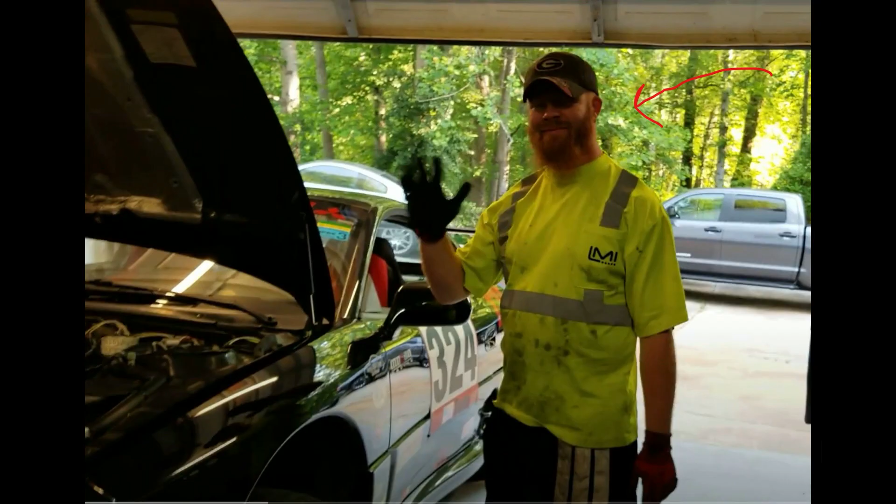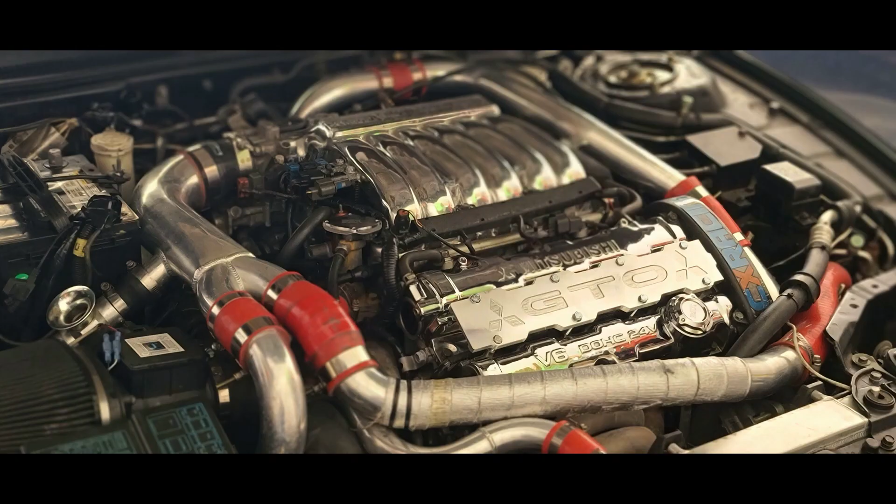I've owned Stickers for a long time, and my good buddy Jeremy Sharp of Remy's Rides and I've upgraded a lot of it over the years. However, one area we have not upgraded is the bottom end. So Stickers is still running on the original 27-year-old pistons, rods, crank, etc. Everything on the bottom end. That's important to note here as we're talking about a 500 horsepower goal.

Personally, I believe it is fairly easy to get these cars into the 400 horsepower range with just a few modifications. With some more, you can get into the 500s. However, once you start aiming for the 600s, 700s, and more, we're talking about a big boy build where you're going to need to upgrade all of your bottom end, as well as other areas of the car, just to support the massive amount of torque and horsepower that you're going to be putting down.

I'm going to list all the upgrades we have on Stickers currently down in the details section below. Ultimately, your vehicle's horsepower is going to come from a combination of all the upgrades that you've made. Some of them will be more significant than others, but at the end of the day, all of them are going to contribute to your car's power.

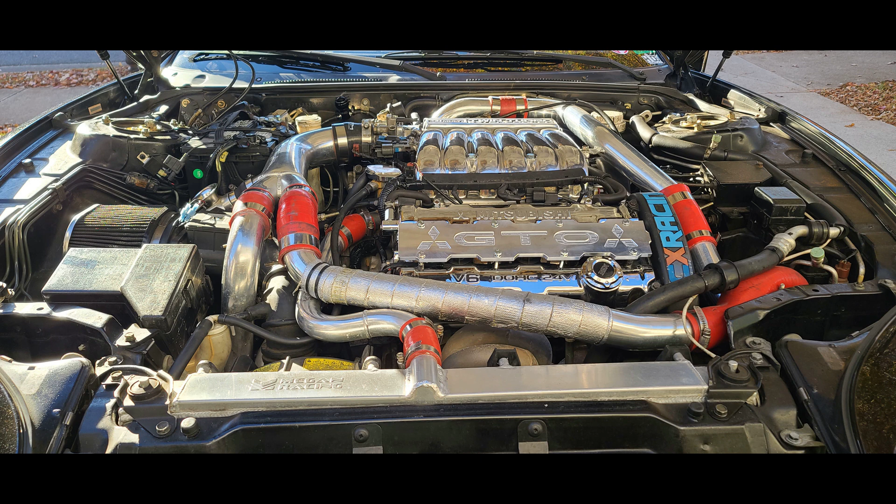For example, having a good free-flowing exhaust system will decrease the back pressure, resulting in less exhaust pressure on your wastegates. In turn, that will allow them to stay closed longer and increase your boost and allow you to maintain that boost longer. Another example is your clutch, because once you start making, say, 400 foot-pounds of torque or so, the stock clutch is going to start slipping. If you don't upgrade that, it won't matter how much your turbos are putting out because you're never going to be able to deliver that power to the wheels.

You get the idea. Now, having said that, the two primary upgrades that are going to be necessary to get into that 500 horsepower range are going to be turbos and fuel support. Without going into a tremendous amount of detail we discussed in the past video, the limitations of the TD04 9B turbos that come with the car. You can upgrade to 13Gs and probably break into the 400s, but if your goal is 500 horsepower, you will need at least TD04 15T turbos or something in that area.

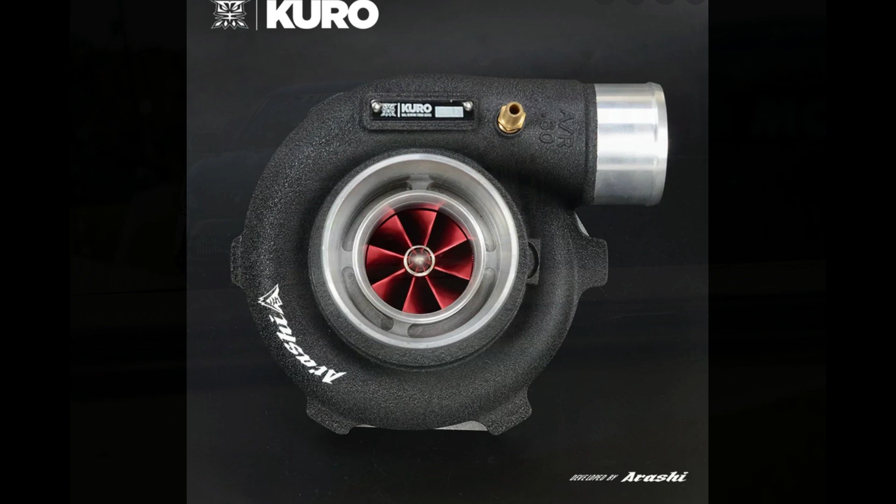Now, Stickers is running on 16T billet ceramic coated turbos. A lot of our customers are running Arashi or Kinugawa 20Ts, both of which provide a lot of support above and beyond 500 horsepower. As well, I'd recommend the 3SX Executioners.

So with the upgraded turbos, the mistake a lot of people make is that they upgrade just the turbos and expect to suddenly start making a lot more power. But in order to spin those bigger turbos faster, you will have to supply a lot more fuel.

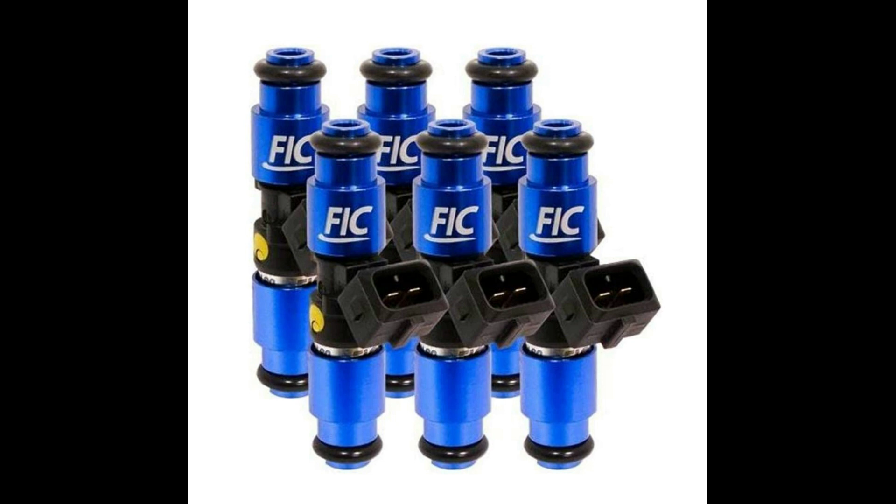And that starts with upgrading your fuel injectors from those stock 360cc to, let's say, a minimum of 750cc injectors. And that's if you're running pump gas, maybe pump gas with meth injection or race fuel. If you're going to be on E85, then you're going to need a minimum of 1000cc injectors. Bear in mind that the higher octane fuel you run, the more boost and the more timing you'll be able to add without running into knock.

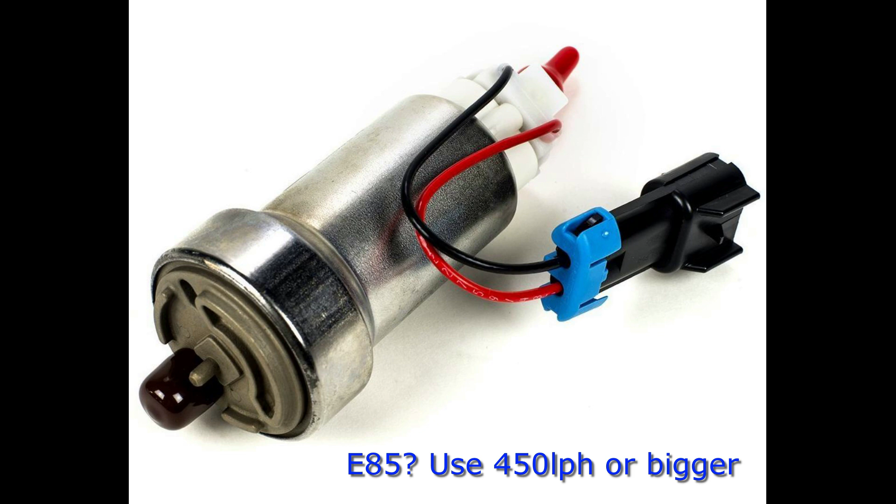Fuel choice is also a factor in how much horsepower you can make. In order to support those bigger fuel injectors, you're going to need a bigger fuel pump. A minimum would be the standard upgrade to, say, the Denso or Walbro 255 LPH pump, along with a hot wire kit and an aftermarket fuel pressure regulator.

With the bigger turbos and increased fuel delivery, you'll have enough power in your hands to dramatically change your car. However, unless your car was built in 1998 or 1999, you're going to need an aftermarket ECU in order to tune the car to handle all that additional fuel and the bigger turbos.

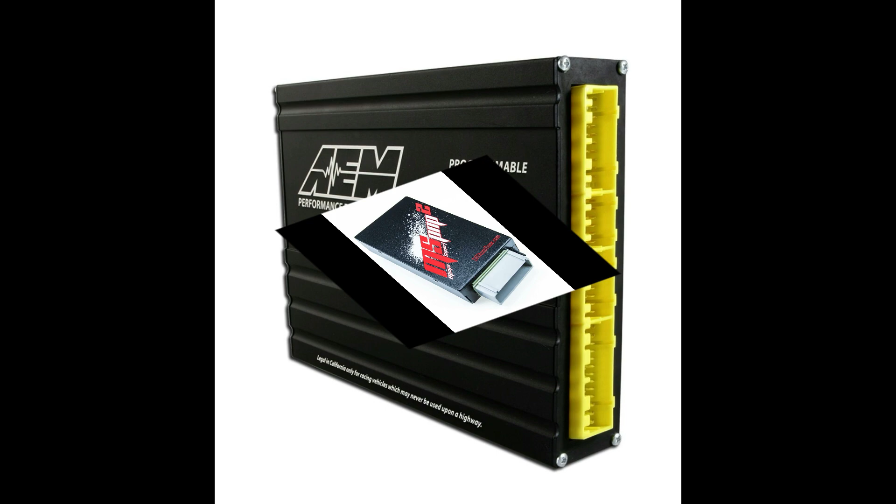And here's a very important thing: you can get to 500 horsepower or more on practically all of the available aftermarket engine management systems for the 3000 GT. That means you can get there with flash tuning on a Jester Chrome ECU. You can get there on a standalone like AEM, whether that be version 1, version 2, or Infinity. You can get there on Megasquirt, you can get there on Haltech. Each of these engine management systems has things that make them unique, but they all also have a lot of things in common that we as tuners use to create more power.

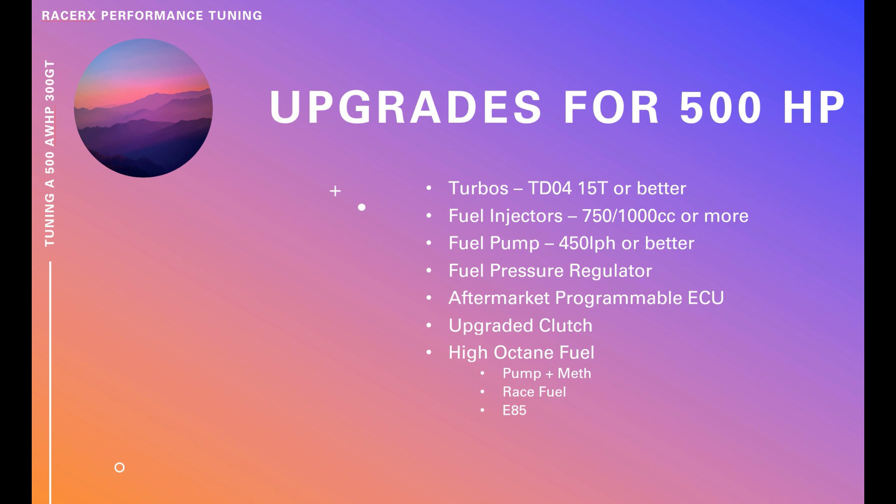So let's get this car up on the dyno and talk about the tuning. At RacerX Performance Tuning, we do a lot of remote tuning as well as local tuning. Everything we're going to do here on the dyno, you can essentially do something quite similar with a closed private road, as long as that road is straight, flat, has no curves, so you can repeat the same wide open throttle pull over and over again to have consistent pulls.

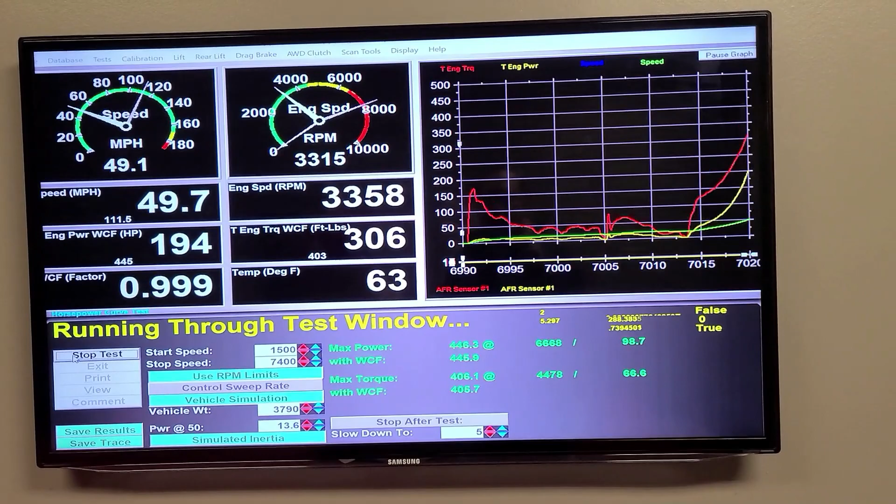As many of you know, we did some tuning with stickers over at DBW Motorsports with Doug Wilkes last year on their Mustang dyno. At that time we ended up around 475 horsepower or so, and my goal here would be to see how much we could improve on that.

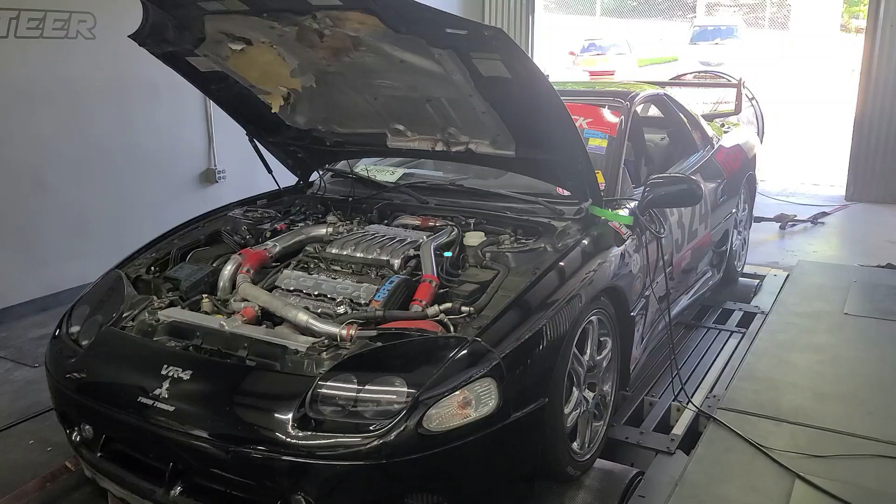Going to work on a few things. I haven't had a chance to tune stickers in a while, so we will see what we're getting, what we can get, and just have a little bit of fun here with my own car. Gonna get going here. We're gonna work on fuel first, which we actually did a fuel run already and it seemed to be pretty good, so that's great. Then we're gonna work on boost and then timing and see how far we can go. So here we go.

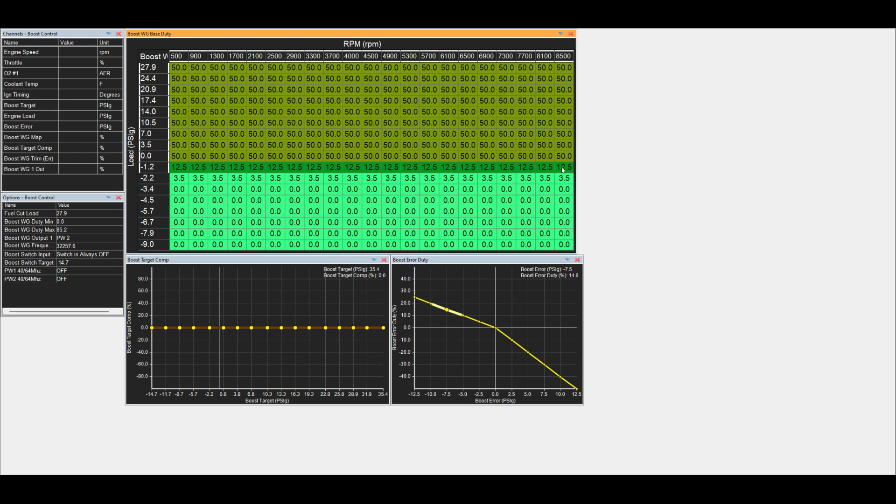And then you can come into your table up here, where you were manually manipulating all the wastegate duty cycles at the various boost levels and RPMs. Again, you can just set all of these equal to 0, and you have the same effect, essentially 0 wastegate duty cycle coming out.

Just for good measure, although it may not be necessary, you can come over to your advanced boost table and make sure you zero out all of your boost targets. Here we had a boost target of 13.3 based on the vehicle speed sensor. Again, select all the values and set them to 0, and essentially there'll be no boost commanded whatsoever.

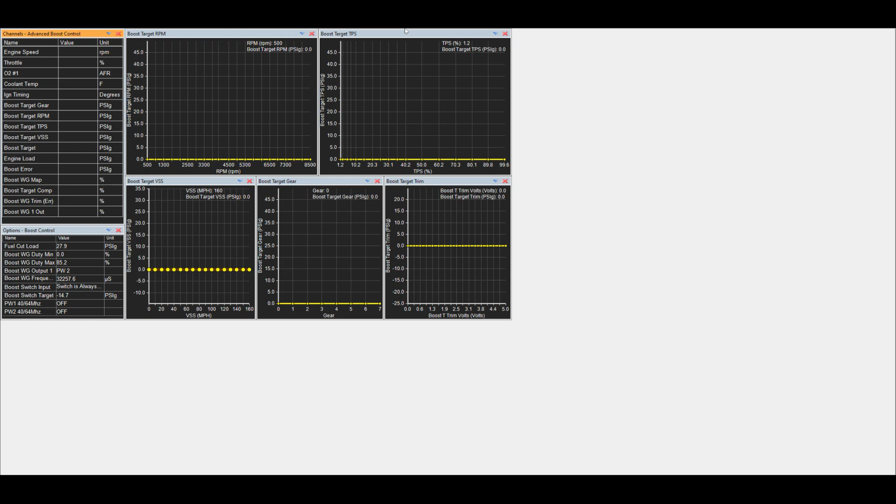This is how you're going to end up running at wastegate duty cycle. Next, we'll go over to our ignition tab, and here's where we're going to go in and severely retard the timing. The way we do that is go into all of the areas that are in positive manifold pressure here, so in this case from 28 psi down to about 3.5, and take off about 4, 5, 6 degrees of timing.

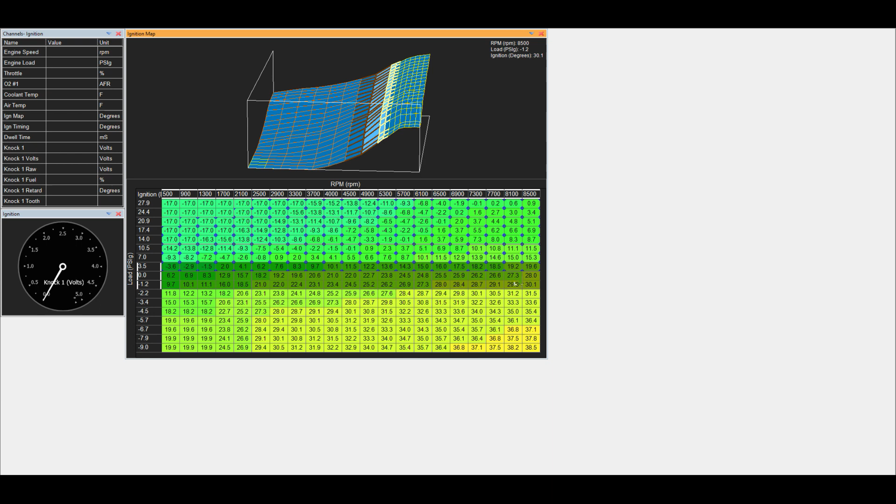Let's take off 5 degrees here, and that's going to bring us down quite a bit. From there, we want to keep things smooth in our table, so we'll do a little bit of linearization, or vertical interpolation, just to keep the map smooth. This is going to take timing out of our equation, allowing us to do that wide open throttle pull without timing being a factor.

You do want to be careful here though. You don't want to reduce timing too low, otherwise you end up with a bit of an anti-lag effect, and essentially you get what's known as boost creep. It will show up at the end of your RPM run, so be careful as you look into that.

When we do this, we're going to have a lot of valuable information available to help us. First, we're going to find out exactly what our wastegate spring pressure is. This will be the lowest possible boost that we can run. We'll also be able to see what our car's baseline horsepower and torque values are, essentially the car running at its weakest power level.

It's always good to know where you're starting from, so you can see how much the tuning process adds to the car's ultimate power levels. So having taken out all the wastegate duty cycle and retarding the timing, we're going to make that pull on the dyno, and then we can look at our results.

So what are we finding here? First thing we found out down here at the bottom is that our maximum boost was 11.24 psi. So basically 11 psi is the most we're going to make, and if you look across the line here, it looks like it essentially stayed at about 11, maybe rolled down to the mid-10s. As we move down a little further here, yeah, it stayed pretty much around 11 psi.

So that's our wastegate spring pressure. We know that it's 11 psi, and we can never go below that. Then at the top here, we're looking at our maximum power. We know that this car, without any wastegate duty cycle and without any timing, is making 334 horsepower and 307 foot-pounds of torque right out the gate. So this is where our starting point is going to be, and we're going to see where we go from there.

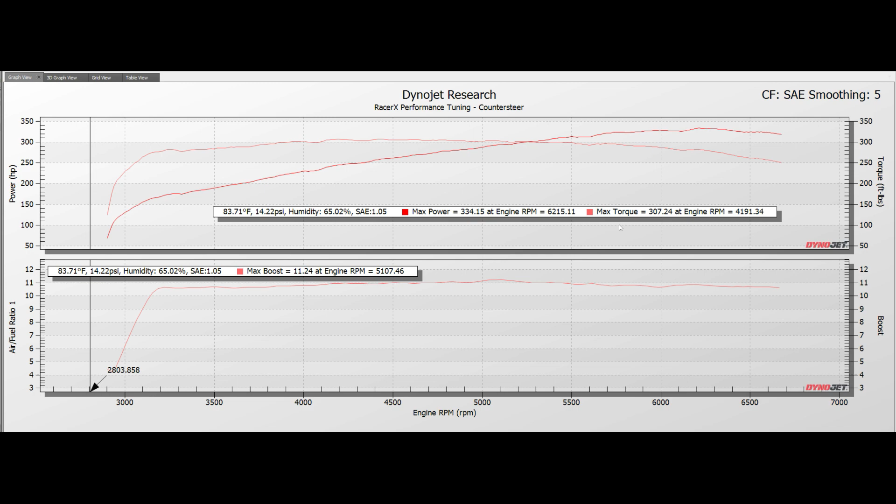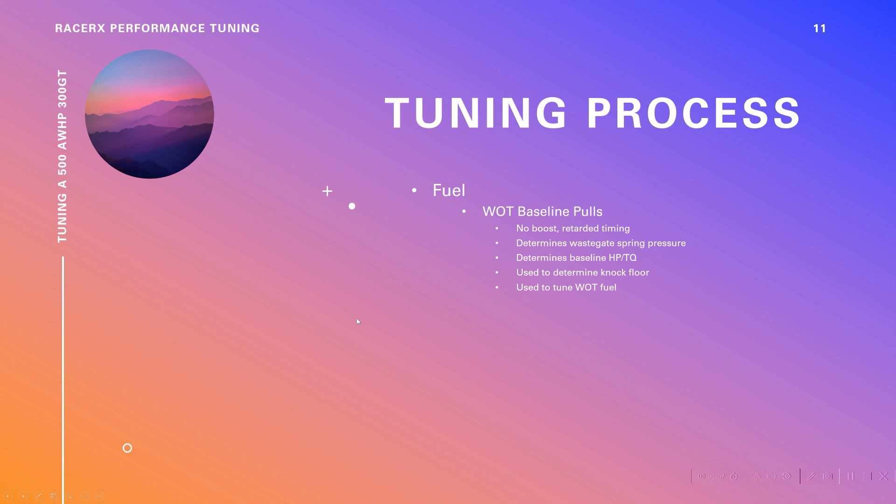We'll also be able to use all this information from our wide open throttle baseline pulls to determine the knock floor, and of course to do all the wide open throttle fuel tuning. We can also use the data from these baseline pulls to determine basically our knock floor.

Now, how you do that is you'll basically go in and take all the raw values, the knock cylinder 1, 2, 3, 4, 5, 6 if you're using a sequential system, or just a knock 1 raw value if you're using a wasted spark system, and go in and chart all this data at 800 RPM, 1600, 2400, 3200, and all the way up until you reach your red line.

What we're going to be looking for is the average voltage, or essentially the average noise that the knock sensor is pulling up at these various RPM levels. It is going to get noisier as you go up in RPM, and if you have a built engine, it's going to be noisier than a non-built engine. The point here is to determine what those average points are and put them into your knock sensor calibration table.

This way, if you are experiencing knock voltage that is above and beyond your knock floor, your knock control system will come into place and start reducing timing or adding fuel, or both.

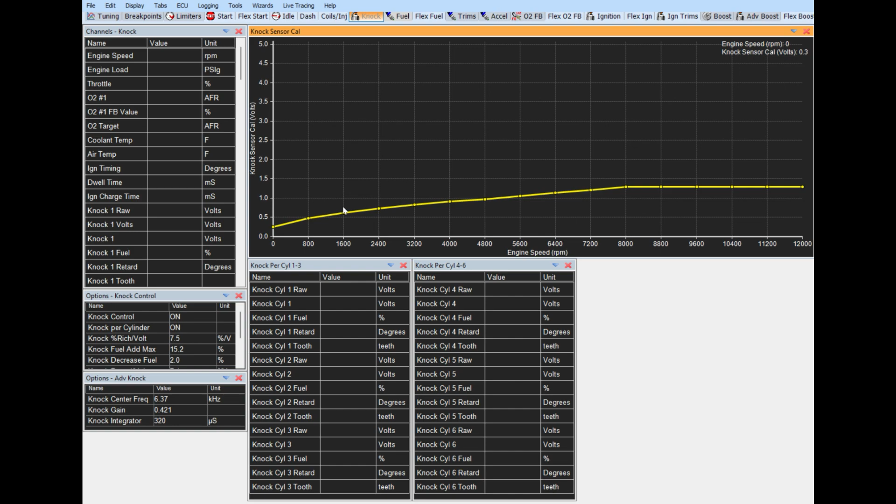If we take all our data from our data log and dump it into Megalog Viewer, we can make a number of charts that can help us evaluate what's going on during the course of our wide open throttle pull. So we'll have areas here where we're going to look at all the fuel characteristics that we want to evaluate.

We've got knock information here. We've got wastegate duty cycle and boost target information here. At the bottom, we've got the RPM and the throttle position, and then some other things: ignition timing, injection duty cycle, and some temperatures.

So essentially, when we scope out the part of our pull, we can see that we're going wide open throttle here from the beginning of this log all the way to the end, and the RPMs are going up from about 3,000 all the way to the end here, which is about 7,000. That's the range we're looking at.

We'll focus in specifically on a couple things. One, as always, every time we do a pull, we want to go in and evaluate if we've got any knock. This car is on a sequential system, so we're able to do knock per cylinder. So I've got all 6 knock cylinder values here. Obviously, I'm expecting to see zero knock information, and that's exactly what we got.

If we're finding that we get any knock here at all, and we've got retarded timing and no duty cycle for the wastegate, then we've got a significant problem. We've got to take a step back and see what's going on. So this is just basically a sanity check here. We shouldn't see any knock at all during this pull.

So now focus on the area that we came here for, which is the fuel. If you see this red line and white line, they're basically overlapping each other, which is a really good sign. It's essentially saying that our O2 target and our actual O2 values are pretty much in sync with each other. Now, this car was previously tuned, so I'm not surprised by this. But if the car hadn't been tuned, we should expect to see some variation here, and we'll go in and manage that.

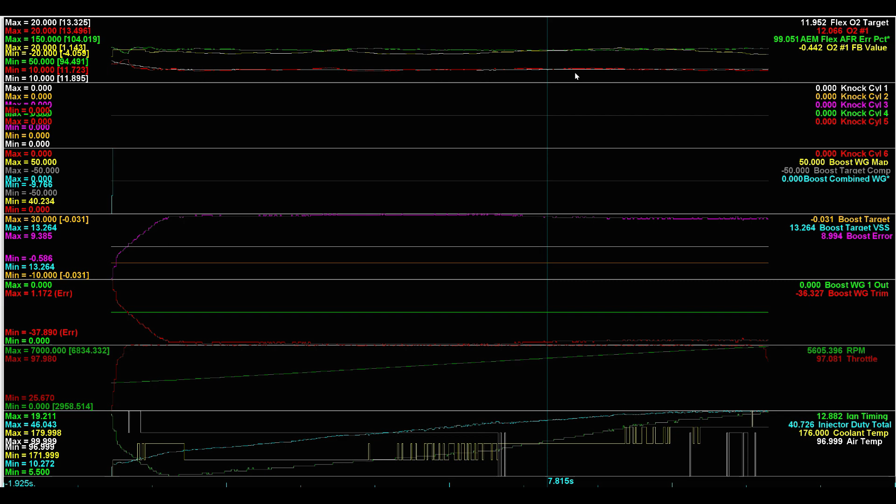Really nothing to worry about here. So again, this looks really, really good. If I see these two lines overlapping each other, I have a feeling that things are going rather well. What I can expect is that at some point previously this car wasn't tuned, that the red line and white line would show some discrepancies. And that's going to help us identify where we need to go into the fuel map and start to make some changes.

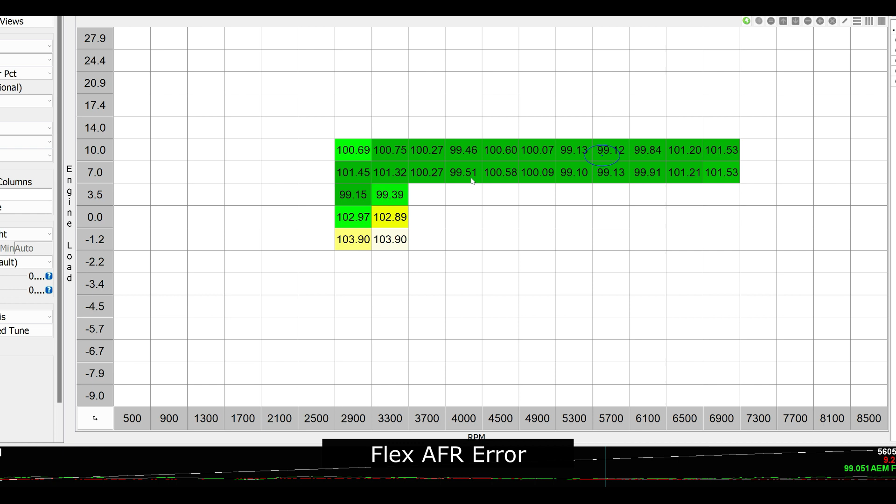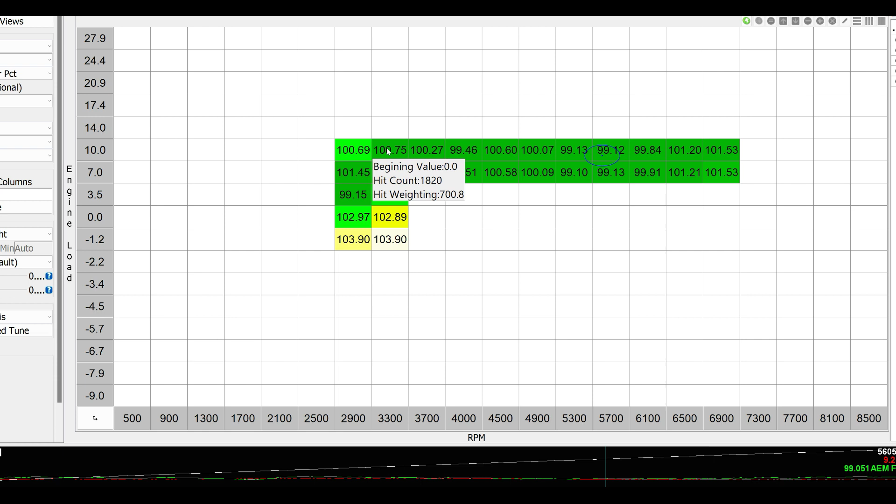We go in and use a calculated field, which is going to say what's the discrepancy between my O2 target and my actual O2. This value I call the flex AFR error percentage. Essentially we're looking for this number to be at about 100. If the division between the target and the actual O2 value is right on point, it'd be at 100.00. If it's a little bit higher than 100, we know our fuel is a little bit rich. And if we're below 100, our fuel is a little bit lean.

What we're looking for is values that are obviously outliers here. We see 99s, 100s, 101 - we're pretty much right in the ballpark. That is reflective of what we saw in our log view, where the red and white lines were on top of each other. So far our fuel looks pretty good here. We go back and make some adjustments, based on where we had discrepancies in our AFR error percentage. We can then go back into the calibration and make the appropriate adjustments there.

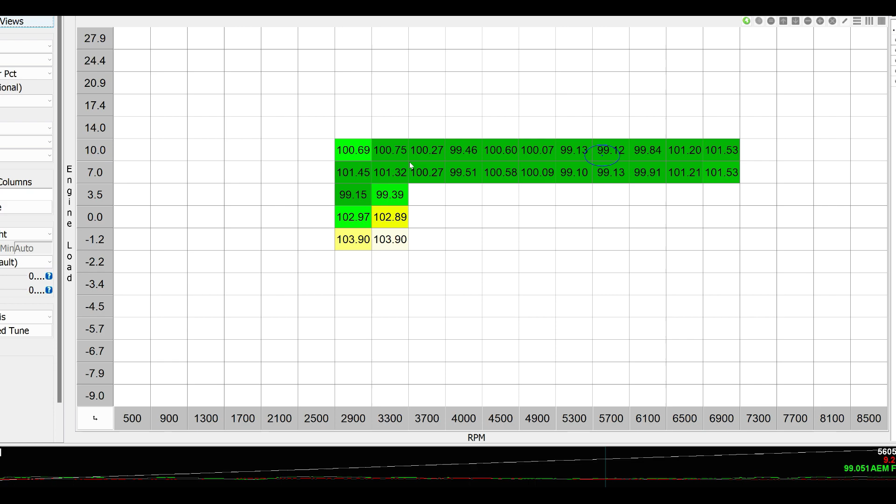So for argument's sake, let's say we found out that during our data log we were running a little bit lean in some areas, or rich. Let's say we found we were running a little bit lean at 10 PSI at 5,300 - let's say 5% lean. We're definitely going to need to add fuel here in this part of the fuel map to help us avoid a potential knock from running too lean. Let's say at 5,700 we found we were running about 3% lean. So again, we're going to need to add fuel here.

Now, just doing these two alone will result in a little bit of a peak right here in our fuel map. We need to go back in and do some linearization, some vertical and horizontal interpolation, to smooth things out so we don't have these peaks and valleys. So we'll take that 5,700 down to 10.5 where we went, and let's first go and interpolate things from left to right - from 5,700 up to 6,500 down to that 10.5 range, using some horizontal interpolation. That'll help smooth this out a little bit. You can see the change in the map there. Then we'll go from 4,500 up to 5,300, again in that same range, and do some horizontal interpolation. We can see that we smoothed out part of the map here. We still need to go in the vertical direction as well.

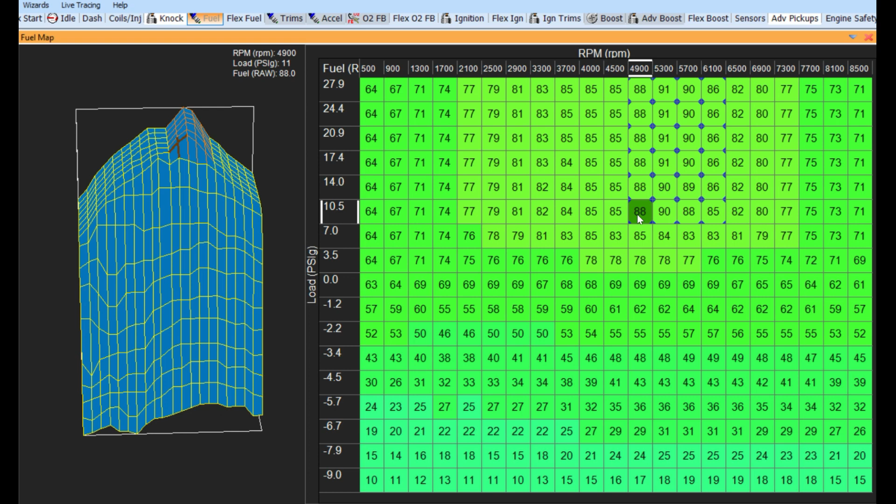Since we made these changes from 4900 on up, from 10 psi to 10.5 psi, let's go back and blend these changes back down into the table, down from 10.5 to 3.5. This will help with that transition there.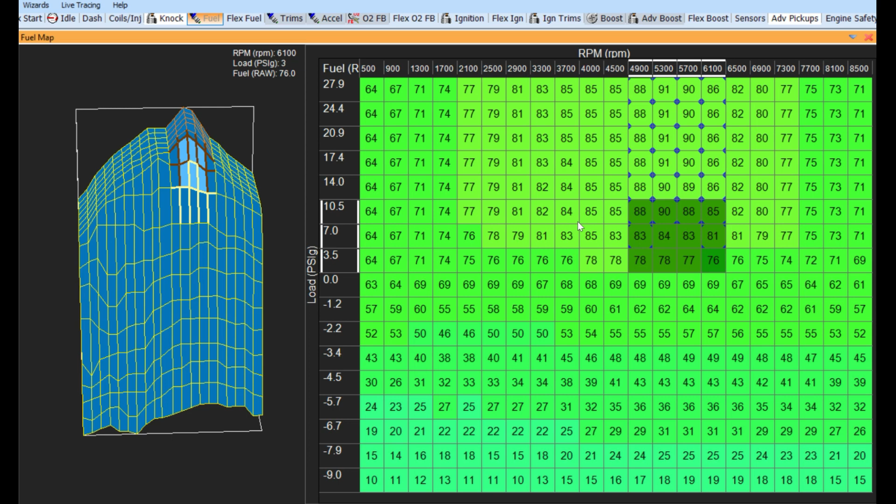So we'll do a little vertical interpolation here, and that starts to smooth out that section of the map. From here, load this calibration onto our car, go back out and do another wide open throttle pull under these same conditions, review the data log, and we should see that we're now no longer running lean in these areas. Probably within about 2 or 3 pulls, we should be able to get all the values in our fuel map straightened out.

And then we'll be done with our wide open throttle fuel tuning. Now, with the fuel tuning complete, theoretically we should not have to worry about the fuel tables anymore, as neither boost or advanced timing should have any effect on the fuel. However, in reality, we will have to continue to monitor it and occasionally make some tweaks to it as we continue.

With boost tuning, our goal, regardless of what engine management system you are using, is to find out how much wastegate duty cycle is needed to generate a certain amount of boost. Once we have these values, we can then easily program in our boost targets and then let some closed loop features add or subtract a little duty cycle as necessary to keep our boost pressure in line.

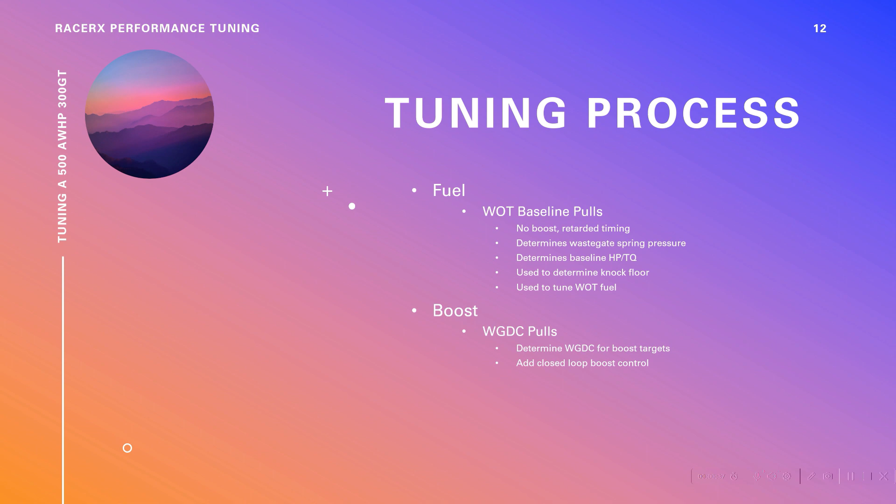You'll find that we can completely optimize boost across the entire power band by using a 3 or 4-port boost solenoid. So AEM gives you a number of ways to set up your wastegate duty cycle.

Remember that word we talked about earlier, equifinality. There is more than one right way to do this.

Now, in the boost tab, you've got these 3 tables: the boost wastegate base duty table, the boost target compensation table, and the boost error duty table. Now these 3 tables actually all work together with each other.

But you could theoretically just go in and manipulate the boost wastegate base duty table and essentially plug in some values for the wastegate duty cycle here that you feel would be appropriate to meet your boost targets, 10, 14, 17, and so forth at these various RPM levels. Go and do some pulls on the dyno and see how well you did and make adjustments accordingly. That is one way to do it, but I think it would be very time consuming and a little bit difficult to manage. Another way to do this is to use these tables together.

So if we go in and, let's say, take all the values from 0 psi on up across the whole RPM range and set them to 50. And then in the boost target compensation table, we also took all of the values here and set them to minus 50.

Now, the effect that this is going to have is essentially: if you have 50% wastegate duty cycle and you have minus 50% wastegate duty cycle, the end result of that is going to be 0% wastegate duty cycle. So essentially right now we're not commanding any duty cycle between these 2 tables. They'll kind of zero each other out.

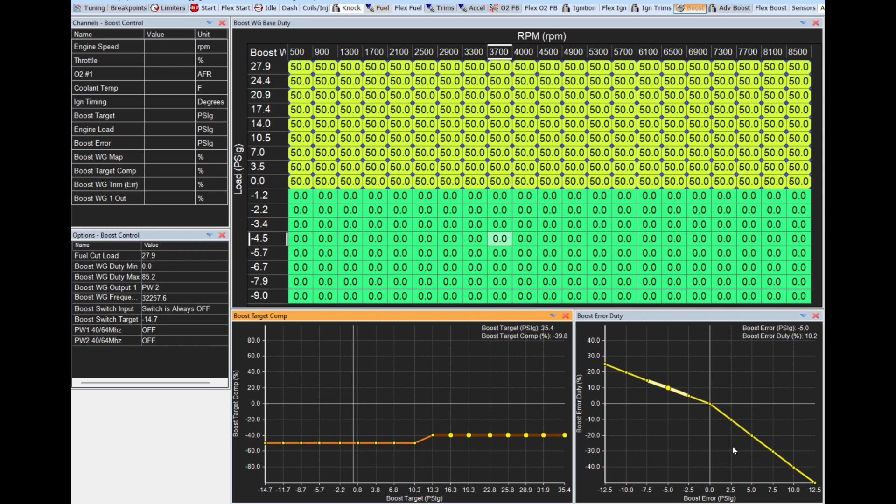So we're just about ready to go and make a pull on the dyno to see how this wastegate duty cycle is going to work for us. But we have to look at a couple other tables before we do that.

The third table on this page, the boost error duty table, is essentially our closed loop. What this does is if we're below our boost target, it's going to add duty cycle up to about 25% here if we're 12.5 psi below our boost target. And if we are above our boost target, meaning we overshot our boost, it will subtract wastegate duty cycle and help to keep us from overboosting.

A lot of people, a lot of tuners prefer to zero this table out while they're doing their wastegate duty cycle boost tuning. I actually like to leave it on because I think that the feedback that we get from this can help us to shape our wastegate duty cycle values a lot faster than we could without it.

Finally, we'll need to move over to our Advanced Boost tab. And here we'll find 4 more tables that all work together as additives. So that's to say, together, these all tables add up to the boost targets that you're trying to get to.

You can have the opportunity to tune boost by RPM, by throttle position, boost by gear, and boost by vehicle speed sensor. Most of the time we start off with just doing this by vehicle speed sensor because it's an easy way to kind of just get all of this dialed in, and then you can manipulate things a little bit later on.

So our first boost target is that 13.3 psi, so we can take all the values and set them to 13.3. So we know that essentially we're going to start to target 13.3 psi as we run through this pull on the dyno.

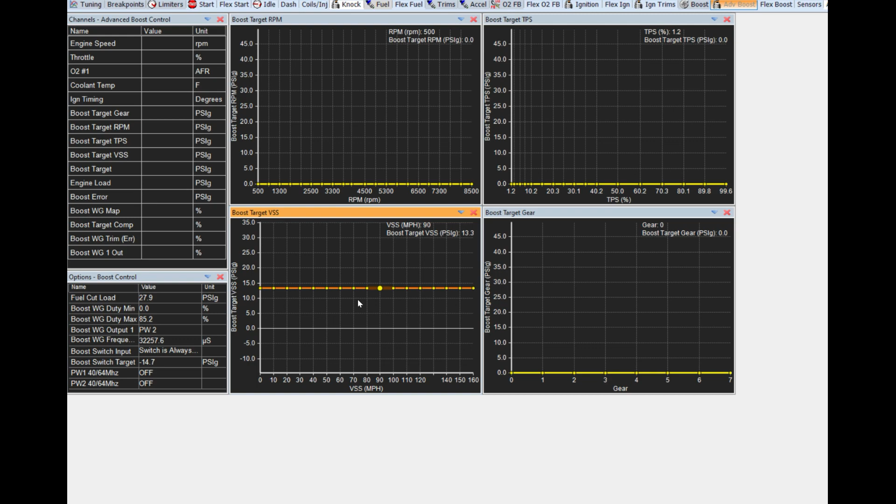Now that we made a pull on the dyno, let's go take a look at the results. As always, we take a little sanity check and just make sure we had no knock. Not expecting any, we didn't have any.

Just checking on the fuel again, red line over top of the white line, and pretty much in sync is telling us that our fuel is still pretty good. We're going to continue to check this. What we do see is that there's a little bit of O2 feedback, subtracting about 4%, maybe 5 or 6% later on. So it's something we can go in later and make some adjustments there. But I will just leave it alone for right now and see how things turn out as we add more boost and timing.

So what do we really want to look at? We want to look at our boost wastegate values. Now let's see how our boost targets and wastegate duty cycle came out.

We had dialed up in our boost wastegate map 50%, and in our target compensation map minus 40%. So together that's going to give us about 10%. Here it's rounded it. The value is 9.376 combined wastegate duty cycle. So we know we're commanding about 9-10% duty cycle, and we're going to see what that gives us.

So what are our results? Well, let's see. Our boost target, as we noted, was 13 psi, and it's the same for the speed sensor, 13 psi. So these two lines are over top of each other, they're matching.

But what do we find out? Our actual boost was 10.582 psi, which is quite a bit lower than our target. In fact, we're about 3 psi lower than our targets. That's our boost error, minus 2.93, essentially 3 psi below where we're supposed to be.

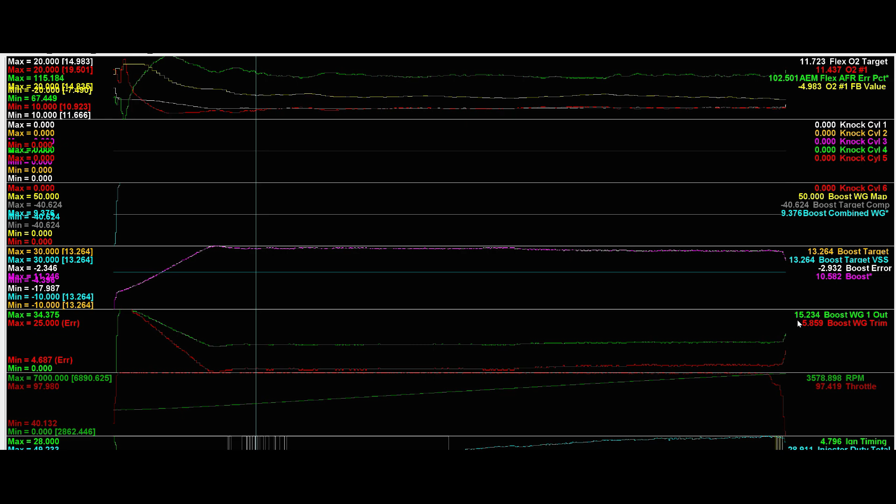So now we can go back, take this information, and update our calibration. And we have something to tell us how to get a lot closer to our boost target.

Coming back over to AEM, with the information we learned from our data log and analysis, we can make some changes. At that 13.3 psi target, we originally added 10% duty cycle and found out that wasn't enough. The ECU used our duty correction file for closed loop, realizing we were below target, and added an additional 5%, giving us 15% duty cycle, and we were still too low. So with that information, let's add some more duty cycle to help us reach our 13.3 psi target.

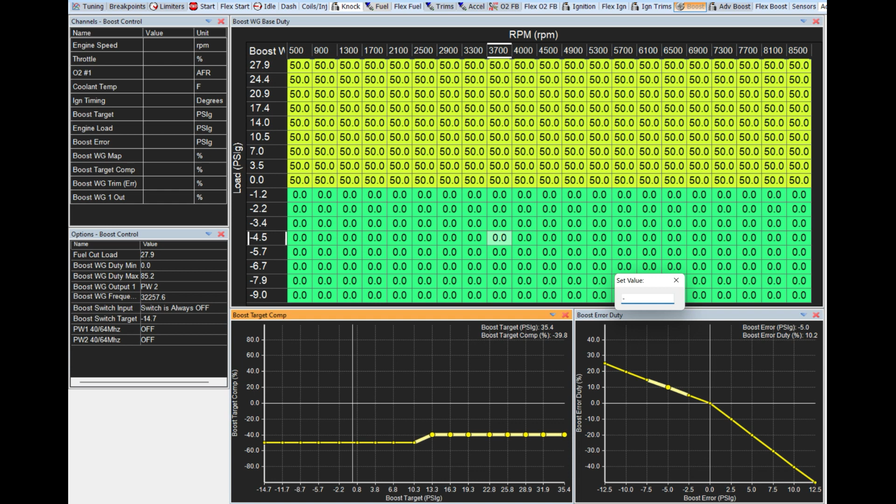This time we'll set this as minus 22. That's going to get us a lot closer to our target with the information we have. The beauty in this is that this is the only table we need to change as we make these adjustments. Before, we had to go in and make all these adjustments based on various PSI targets and RPMs. Here we just need to do it in one spot. So we're going to take this information, do another pull on the data on the dyno, and see what our results are.

With our revised calibration, having made another run on the dyno, we find some really positive results. Quick sanity checks: we have no knock, so I'm not concerned about that. Our red and white lines for O2 and the O2 targets remain on top of each other, so that's also good. No changes in fuel, as expected.

Let's look at what we did with wastegate duty cycle. We had 50% duty cycle from the map, and we subtracted about 22% from the target compensation, giving us a total of about 28% duty cycle now. So before we were running 10 to 15%, now we're running 28% duty cycle.

Let's see the results. Our target still remains 13.3 psi, and now we're commanding 13.5 psi, so essentially right on target. No boost error. Our total wastegate output is 28%, and there's no trim, meaning the closed loop didn't need to do anything to adjust this.

As we go across the rest of the pull, we'll see a few variations, but overall staying true to that 13.3 psi target result, with very little boost error and very little closed loop correction needed from the ECU. This is the success we're looking for, and this is how we'll continue up the rest of the boost targets to finish out our wastegate duty cycle boost tuning.

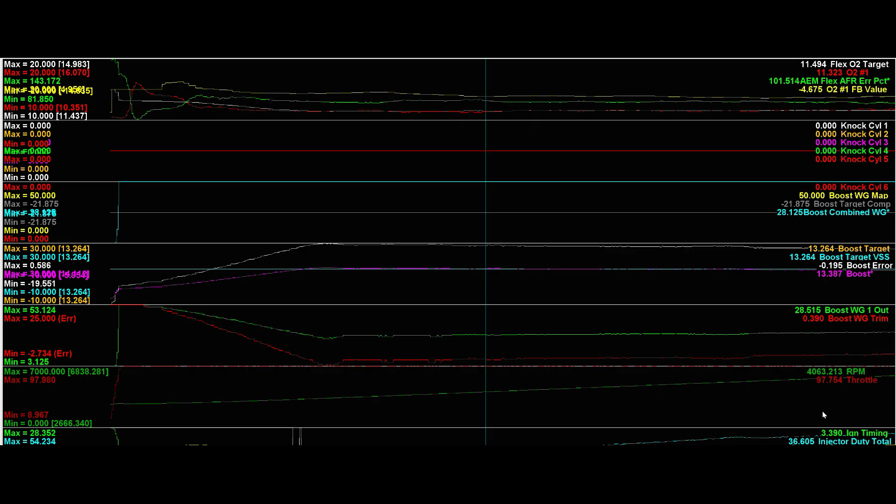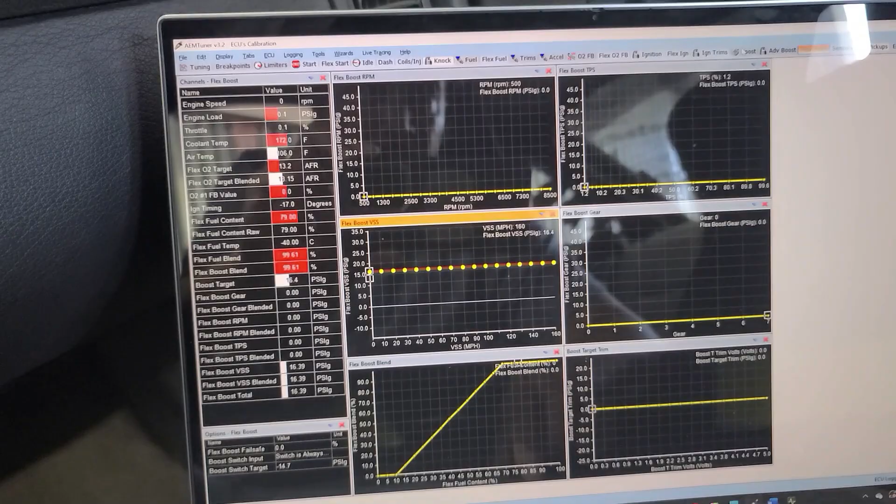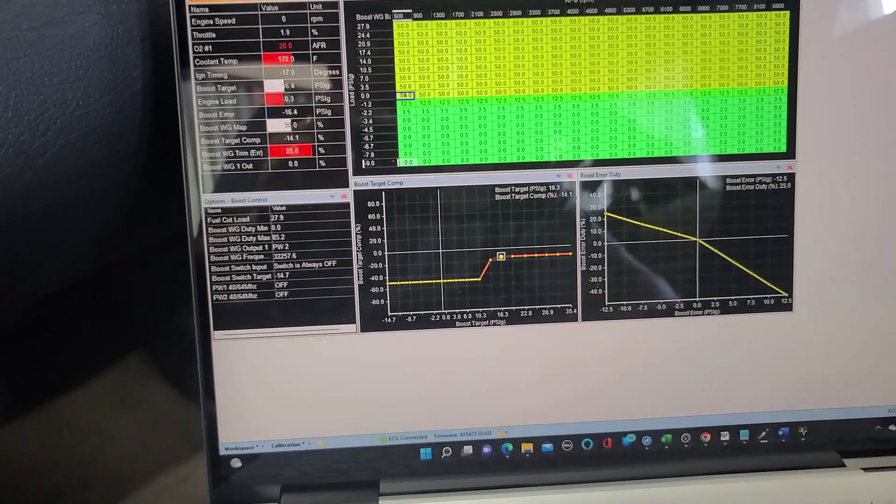Continuing on, fuel is still looking pretty good here. We're working up boost, just working up the boost targets and getting the correct wastegate duty cycle. We finished 13.3, we're working on 16.3 now, and then from there we'll go up to 18 and continue on up. So far so good. 13 is accomplished, let's go on and knock out 16.3.

We continued the boost tuning process in that same fashion. We found we needed to move up a little bit to get to 16.3. Then we targeted 19.3, 22.8, and finally settled in at 25.8, or essentially 26 psi. I decided not to go further than that. We could have looked at 28, 31, or beyond, but there's a reason why I decided to stop at about 25, 26 psi.

Now the beauty in this approach to boost tuning is that you end up only having to work with one table, the boost target compensation table. We get to leave the wastegate base duty table alone and don't have to go through the rigmarole of editing all of these values and interpolating and managing all of that. Simply working on your targets and using the boost target compensation table allows you to get the exact wastegate duty cycle for the boost targets you want.

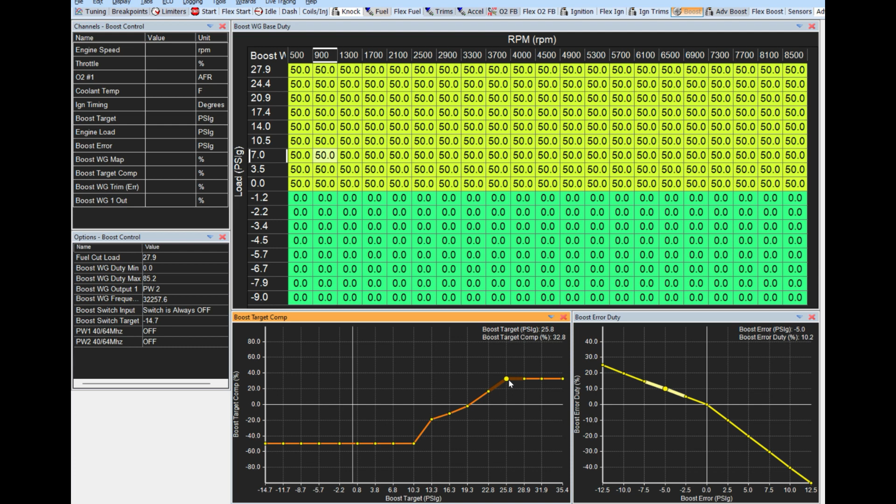Then you go over into your advanced boost tab, where you can set targets you want to achieve at various vehicle speeds, target RPMs, target throttle position, or boosting by gear. The only additional thing you'll see here is at the end. And as I mentioned, all four of these tables work as additive.

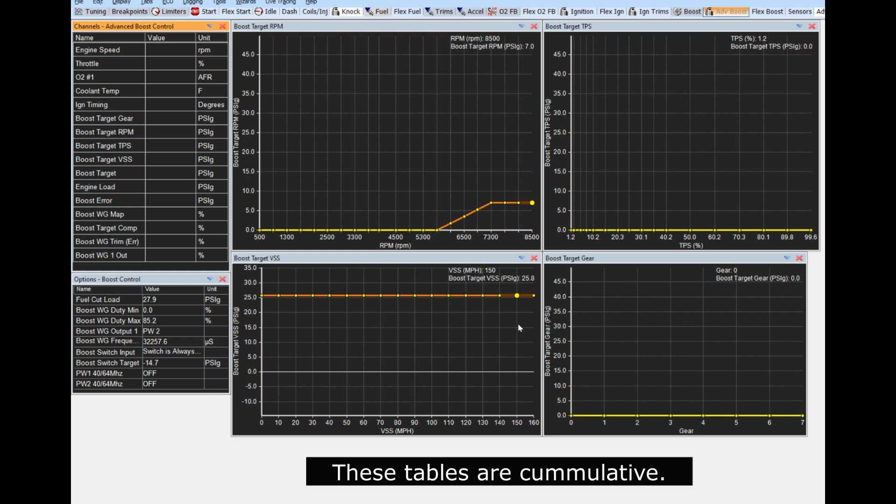So these things together will be added up to be your boost target for your wastegate duty cycle. Essentially, we know that when we get toward the end of the RPM range, we're going to start to lose boost. One way to compensate for that is by taking your boost target RPM table and slowly adding a little bit more boost as you get toward the higher RPM.

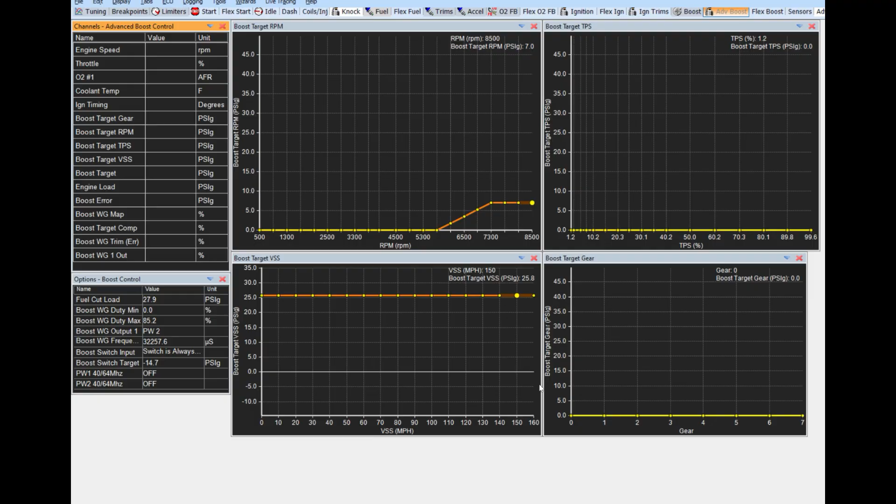It won't always work, but it will try to keep the wastegate duty cycle up there to allow that pressure. Now, as I mentioned, we decided to cap things at 25 psi. What does that entail for us? We had a 32.8% target boost compensation combined with our 50% base wastegate duty table. Essentially, we were running 83% of our wastegate duty cycle to get to this 26 psi.

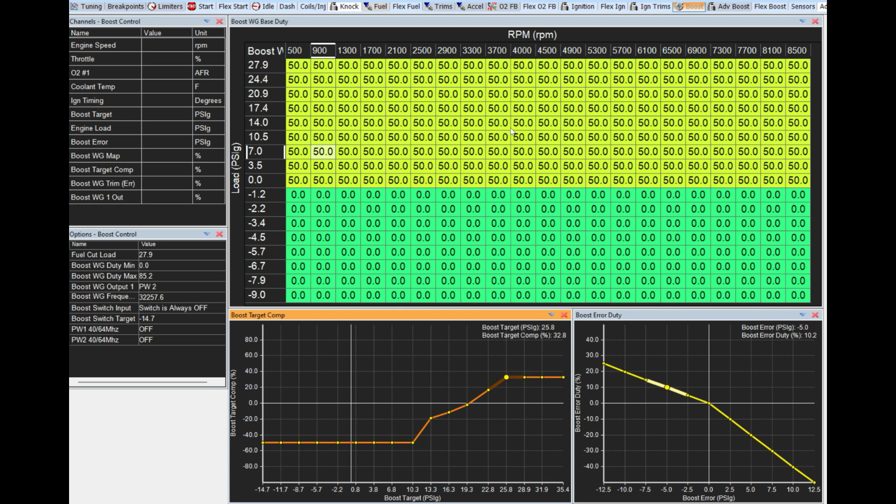Now, could we have added more boost? Yes, but we don't need to. A lot of people, tuners included, think that they need to run as much boost as possible to get the most power from the car. Now, we can continue to make more power while simultaneously prolonging the life of our turbos, right? And that comes with timing advance. So boost and timing complement each other. We're going to see that here in just a moment.

But let's see the results of what we got from the boost tuning that we did do.

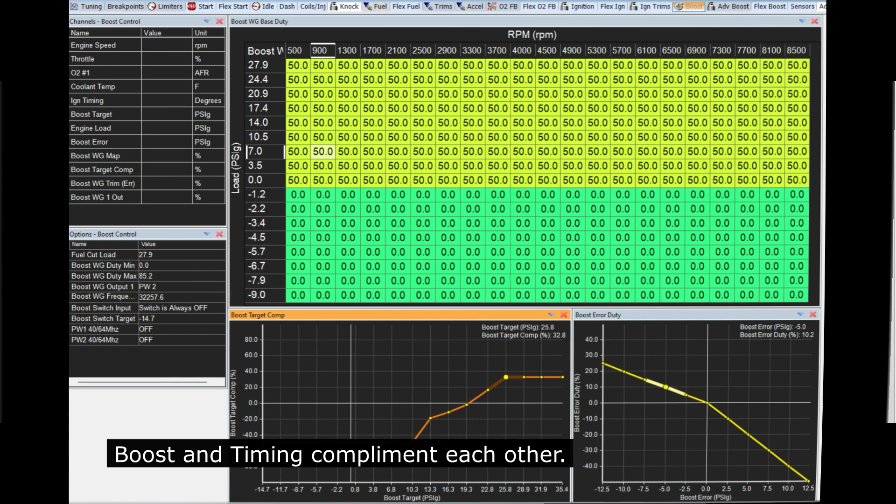Looking at our results on the dyno, if we go back to when we made that baseline run, we can see that we were making 334 horsepower and 307 foot-pounds of torque at that 11 psi. So right there was our baseline. And by adding, looks like we added 13 pounds of boost overall here at the end. When we look at the end here, we ended up getting to 410 horsepower and 376 foot-pounds of torque at about 25 psi. So just through adding boost alone, that 13 pounds of boost, we added 75 horsepower and looks like about 70 foot-pounds of torque.

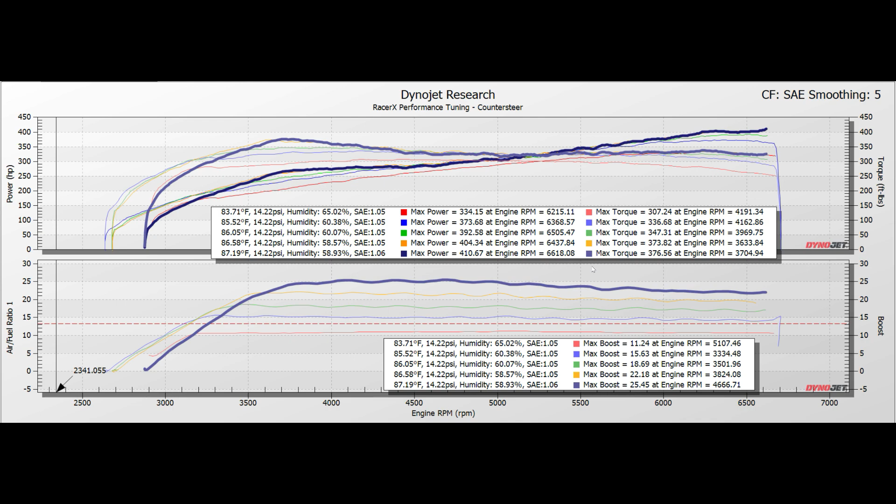And that's not bad. So we're going to take from here and start to do the timing, and we're going to see what more power we're going to make without adding more boost and without having to change our fuel.

Now we've reached the final stage in our boost tuning process, right? We did all the fuel. We haven't had to mess with fuel since then. We did all the boost tuning, and we shouldn't have to change that either as we move forward into timing.

With advanced timing, we're going to work out to this thing that's referred to as MBT, or maximum brake torque. And what that means is we're going to try to get the most timing that we can run without running into knock. And once we've reached the fact that we can no longer make any more torque gains, that's the indication that we can stop raising timing. So we're going to look at that and see how we can maximize timing across the entire power range, the same way that we kind of did with boost.

The interesting part and the most important part is we're going to have to really start to look out for knock right now. We didn't have any knock when we were doing fuel tuning because we didn't have any boost and we didn't have any timing. And we didn't have any knock when we were running into boost because we didn't have any timing.

So for sure, now when we start to get to a certain point in timing, we can anticipate that. We are running on E85. If you're running on E85, race fuel, you're going to have a better chance at warding off knock than if you're running on pump gas. But in either case, you're going to have to look out for it and manage it when it arrives.

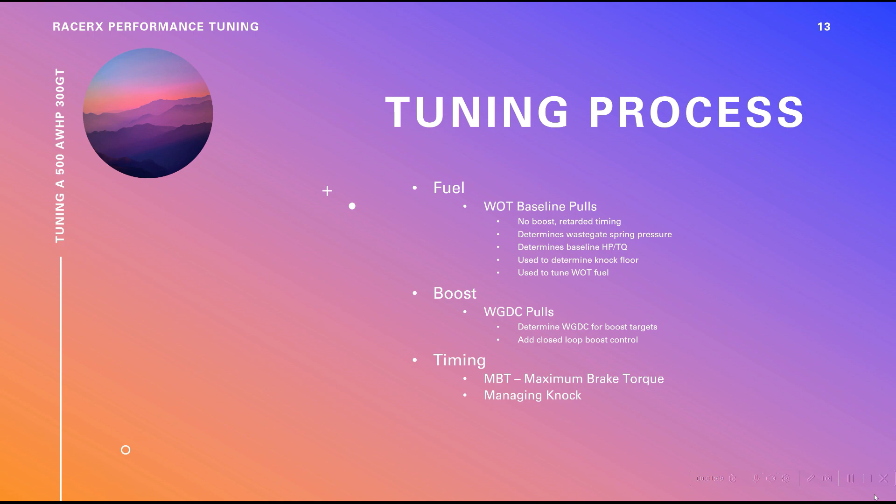Coming back to the ignition map, you'll recall at the beginning of the tuning process, we detuned a whole lot of this map, essentially taking out, I think it was 5 degrees we took out all the way from 0 psi all the way on up.

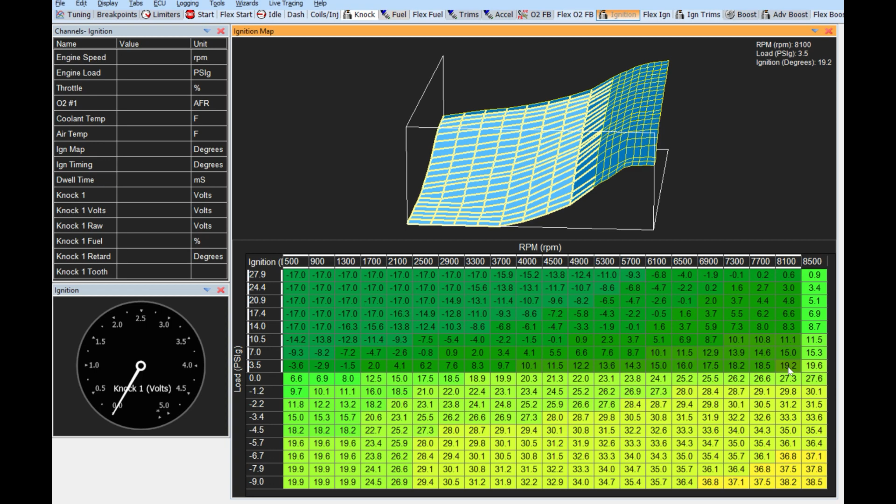Now, my general rule of thumb is to start by adding in 3 degrees at a time. And for this session, we'll start and add 3 degrees all the way across the top from 3.5 psi on up. We just simply push the add button, and we're going to add 3 degrees to all of these values. And then we'll simply go in as we did before and just blend it back into the table with a little bit of vertical interpolation. That'll keep the table smooth, and we won't run into any issues there.

So with this 3 degrees added back in, we'll be able to go and make the run with that and see what our results were.

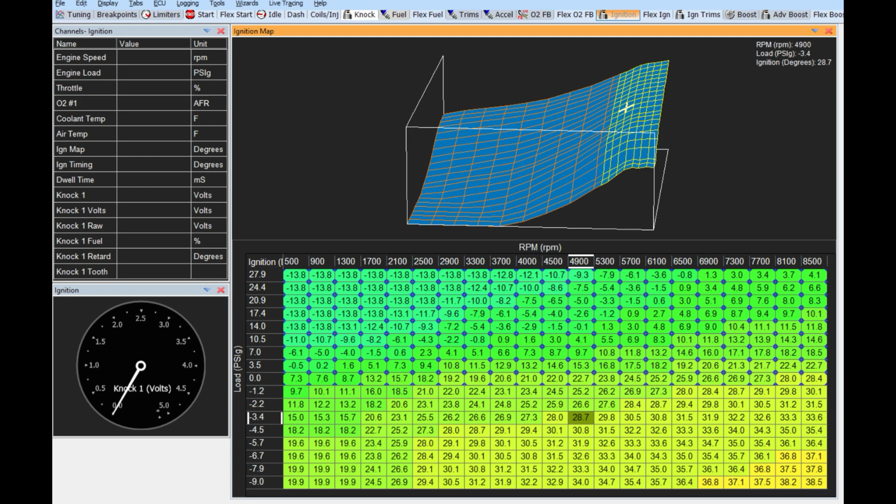Okay, so this is our first timing advance. We're going to add 3 degrees across the top. We're going to keep the boost cap right there at 25.8.

Evaluating our results in the dyno chart shows that the impact of just that 3 degrees of added timing is immediate and impactful across the entire power range. We went from approximately 410 horsepower and added in another 16 horsepower, bringing us up to 426. And on the torque side of things, we went from 376, adding in 30 foot-pounds of torque, bringing us up to 405 with just that 3 degrees of timing that we added.

We're going to be looking at the difference between the previous run and the next run each time we add timing. Here we can see that the red line to the blue line, there's a nice gap between the two, showing a significant increase in torque that we're looking for. As MBT starts to get reached, at some point these two lines are going to line up together. Wherever they've lined up, essentially at that point we've maximized the timing we could add for that RPM range, and we can stop adding timing there. There may be other areas of the graph still showing a gap, and we can continue adding timing in those areas until that gap goes away as well. That's how we're going to work toward MBT.

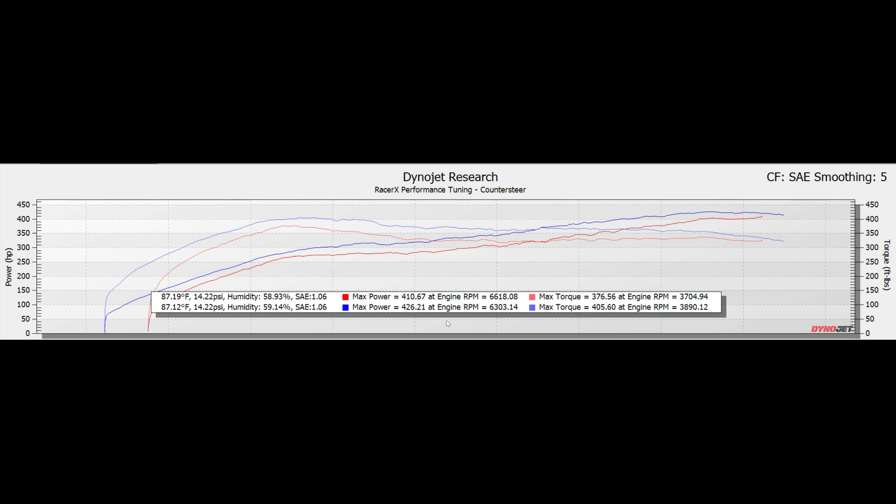Alright, so now we're going to add another 3 degrees of timing from 3.5 psi on up, blend it back in, and see what we're going to get.

As we continue to add timing, we're going to start to notice that the gap between our torque gains slowly starts to decrease in certain areas. Here we can see from 3000 to about 3500, the gains are really shortening up. And from 3500 on up, we still have room for gains to be made. This is where we've reached some maximum brake torque. Right here, we've kind of maximized the timing, and we can stop adding timing in this area of the map.

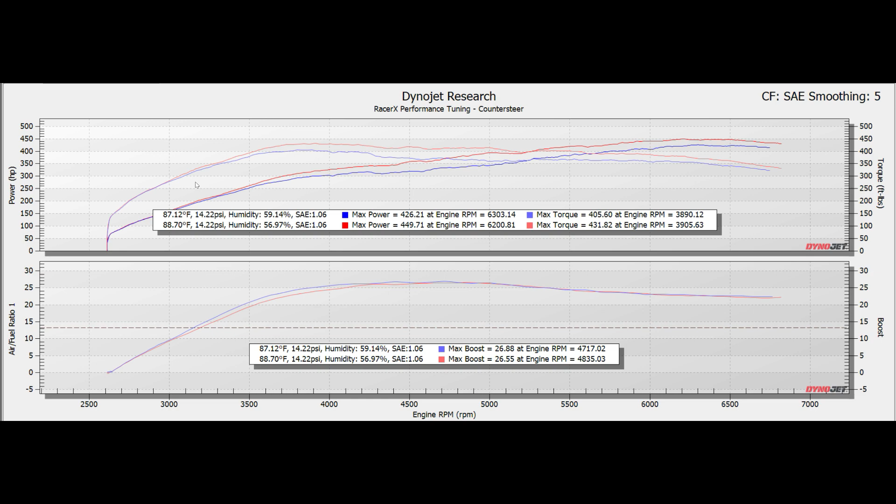Looking at the timing map, up until this point, we've been adding 3 degrees across the board from anywhere in the positive manifold pressure all the way across the whole RPM range. We've been able to get away with that because every time we've done so, we've been seeing torque gains across the board. Now, once we've started to see that we're no longer getting torque gains, we have to stop adding timing in those areas.

So as we noted in the last dyno graph, we saw that from about 3500 on or below, we were no longer making torque gains. So this area of the map, we're no longer going to start adding to. However, the other areas of the power band, we're still making gains. So from 3700 to the end of the RPM range, to red line, we're going to continue to add until we start seeing those areas go away as well.

So the way we're going to do that is we'll take, say, from 4000, from 3.5 psi all the way to the end, and again continue doing what we've done before by adding 3 degrees. We'll add those 3 degrees in there, and then we'll just kind of blend it back into the table so that our map remains consistent. A little horizontal there, and then we'll do a little bit of vertical blending from here on down to minus 1.2. That's how we're going to keep our map going.

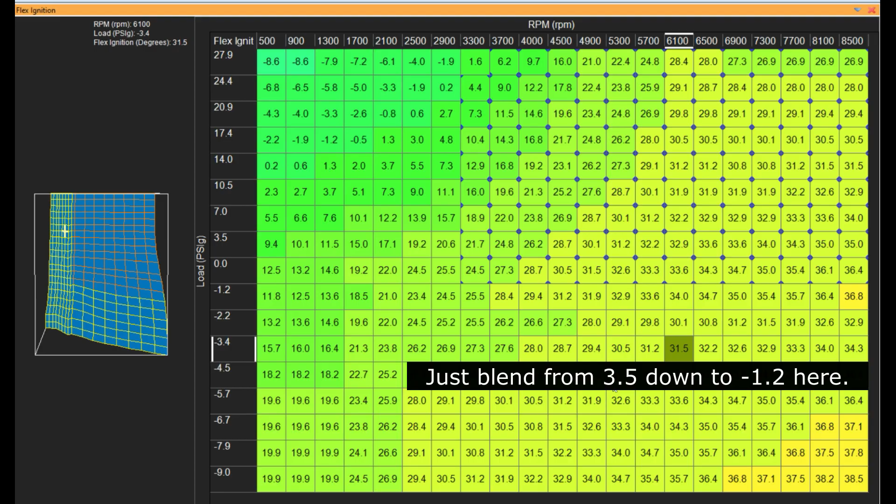Okay, adding another 3 degrees, this time from 4,000 RPMs on up. Last run we got 475 horsepower, so we're trying to get up there.

Looking at our results in the dyno chart, coming from run number 10 to run number 11. Run number 10 is in yellow, and run number 11 is in blue. We can see right now that we've really started definitely maximizing the brake torque and no longer seeing gains in the early part of the map. So here, up through about 4,500 RPM, we've definitely maximized, and we will not be adding any timing there.

You might notice a gap here in the lower RPM range and think there's still room to be made. However, we started running into a bit of a boost leak somewhere along the way. You can see there's a discrepancy here early on, and then things get evened out later in the RPM range. So we were definitely losing some boost there, and that's why we had less torque here.

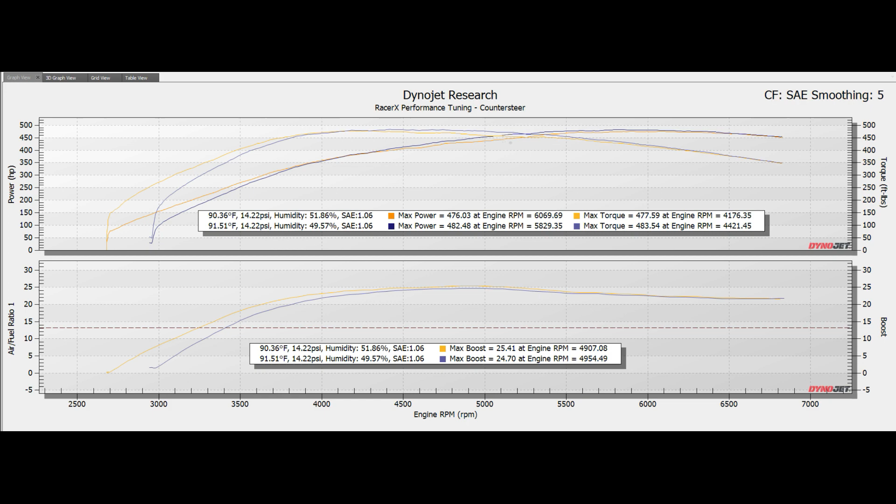But essentially everything from the beginning of the run up through about 4,500 RPM, we've maximized the timing. Later on in the run, from about 6,000 to the end, we've also maximized timing. So we just have this one little area right here in the middle that we can work on, and the rest we're going to leave as it is.

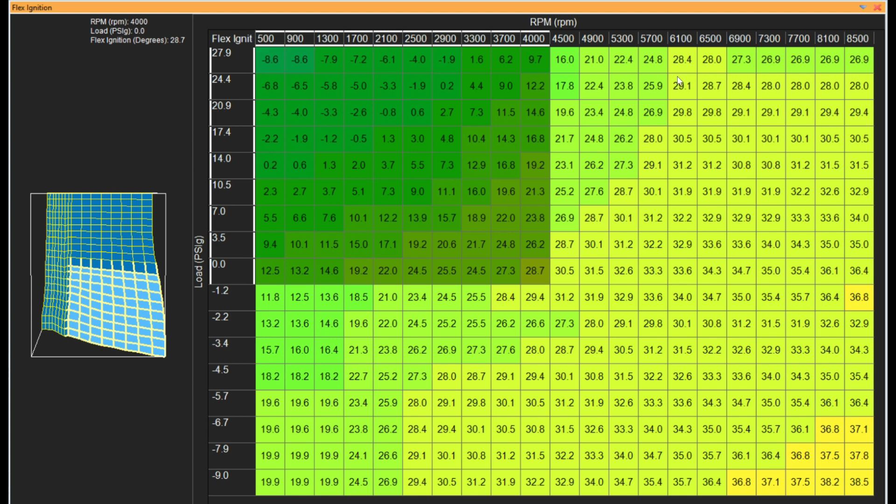Returning once again to our timing map, we know now that maximum brake torque has been accomplished up through about 4,000 RPM, so we're no longer going to be adding any more timing here. We also know that above 6,000 RPM, we've also maximized the timing, so we're not going to be adding timing here. We've got a little bit of room left to work with, and that's just this small area right within here.

So we'll go ahead and add another 2 degrees. I start to get a little slower, not 3 degrees but maybe 2 degrees at this point in time, as we're getting pretty close. So we can add 2 degrees here, and then we'll blend it in again as before. Now, one thing we're going to talk about while we're doing that, let's add the 2 degrees in here.

And we'll blend it from 37 up to 45, and then we'll blend it again from 57 up through 65. The reason I'm doing this blending is to keep the map consistent across the board. Now we'll just go back and once more blend this back down to the 0 line here vertically.

So now we're boosting at about 24 psi, right? And you would think all we need to focus on is this 24, maybe this 21 psi range, as we're not really boosting at 28 to 30, and we're not down here at 14 or 17 either. However, you do want to go ahead and blend things in with the map and keep the map consistent.

In the event that you later on raise the boost up to maybe 28 psi, your timing and map are going to be in sync. And if you decide to lower the boost for any reason, you're also going to have your timing map in sync, and you won't have to redo this work.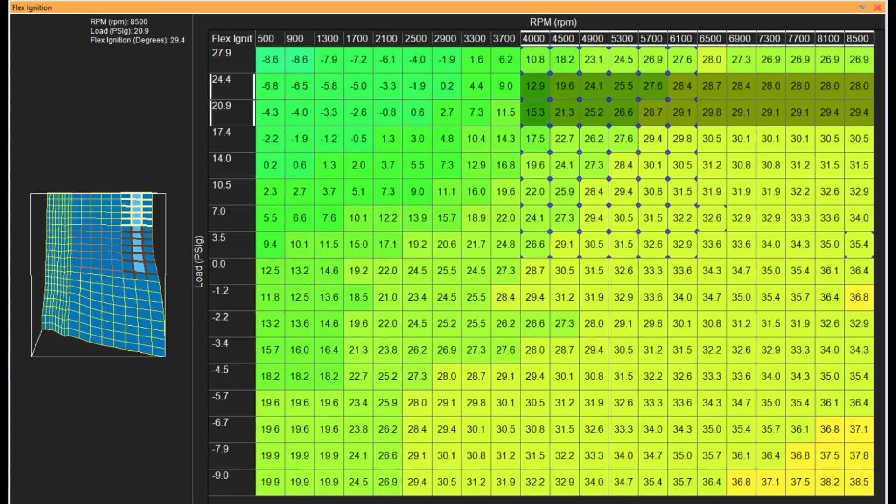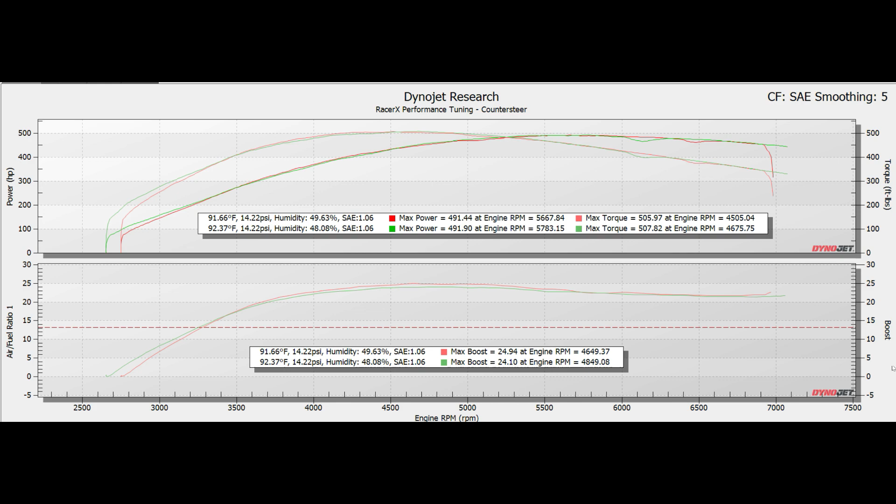And we're going to talk about what that is and what happened here right now. Up until this point, we've been talking about MBT in terms of maximum brake torque, and noticing when we've no longer made torque gains, that being a limiting factor and an indication to stop adding timing.

But however, the other part of the equation to look at is if knock starts to creep into the equation. Once we start seeing knock, that's also an indicator that we're going to have to not only stop adding timing, but probably take off 2 or 3 degrees to keep things safe.

So in that last dyno, we saw there was a little bit of a drop in the horsepower in the latter RPM range. So what happened there? Well, we go back and look, and we see that we encountered some knock here. We're here right at about 6,237 RPMs, which is when we encountered knock.

Now, looking at the raw values, we can see that the noise is going to increase like normal, as it should across the RPM range. As we're getting into the higher RPMs, there will be a little bit more noise. But we do see a few outliers here.

And these are the areas where we're actually resulting in some knock retard that's happening in the system. So what happened here? We have a knock floor that's been established. Let's go and take a look at the knock floor briefly here.

Looking at the knock floor that we set up, we can see that at about 6,400 RPM, the floor is set at 1.1 volts, and at 7,200 RPM, it's 1.2 volts. So if the knock sensor is picking up a voltage of 1.1 to 1.2 and below, it's going to consider that to be normal and expected noise coming from the engine.

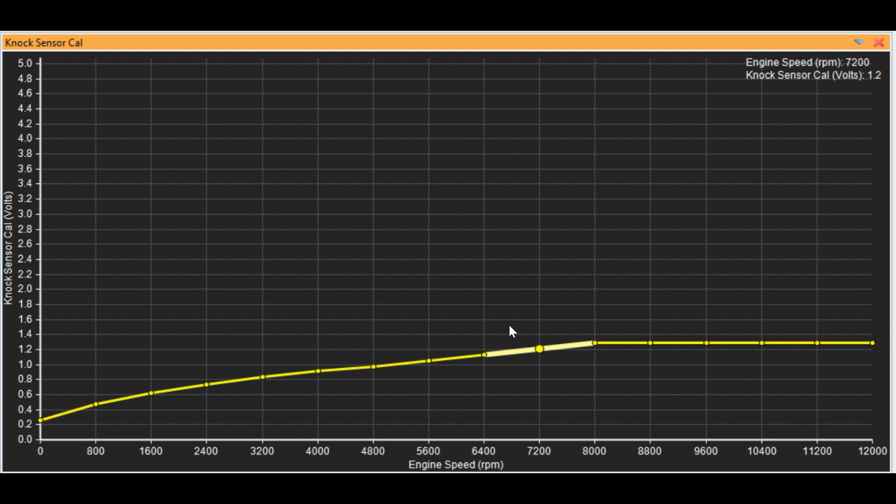If we're above there, though, we're going to understand that this is an outlier and an indication that there's some form of knock going on, and we're going to respond accordingly. So as we look at this in AEM data, we can see that on cylinder number 4, we had 3.19 volts, and on cylinder 5, we also had 1.49 volts. So the 3.19 volts is clearly 2 volts above our floor, and 1.49 is just a little bit above our floor.

So now, Stickers is set up with sequential ignition, so we're able to see the voltages across the various cylinders, and also able to do what we call knock per cylinder, which allows us to address just the cylinder or cylinders in which the knock is occurring and leave the remaining cylinders running at the same timing and fuel that they already have. However, if this were a waste spark system, we would just see one knock reading across all of the cylinders, and the retardation or additional fuel would be applied across the board for all of them.

So what happened here, when we received that indication that there was an event outlying our floor, both cylinders 4 and 5 responded accordingly. Cylinder 4 saw that we were 2 volts above the floor and took off 15 degrees of timing just from that cylinder alone, and added an additional 15% more fuel as a way to try to ward that off.

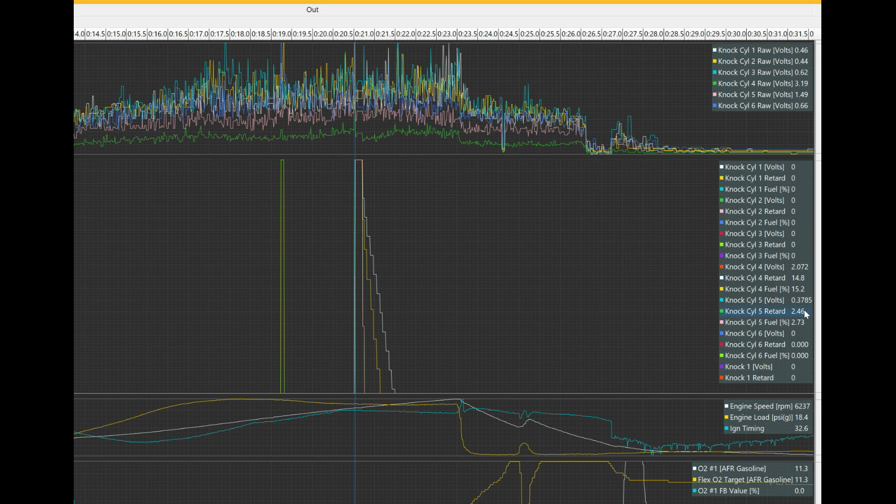And cylinder 5 in turn saw that we were just a little bit above the floor, 0.3785 volts above the floor. It also threw in some retardation, took off 2.5 degrees of timing, and added a little bit of fuel, again to try to ward off that knock. As we move across the remainder of this run, we'll see that this additional fuel and retardation of timing resulted in the knock going away, and then ultimately all of the timing and all of the fuel was restored to both cylinders 4 and 5, and we continued the rest of the run.

Now, this knock occurrence is more likely, or should I say less likely, the higher octane fuel that you're running. So we have options. We can be running 93 octane from the pump. We could be running 93 with a methanol injection. We could be running race gas, 103, 100, 101, 109 octane. And we could be running ethanol, like E85, which is the case with Stickers here, running ethanol at about 80% - I think on this run we actually were about 70% ethanol. So the higher the octane you're running, the less likely it is that you're going to run into knock.

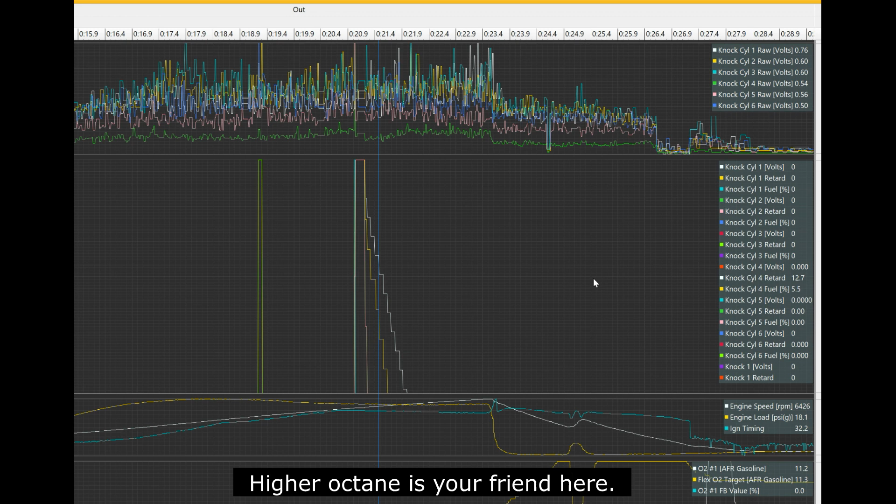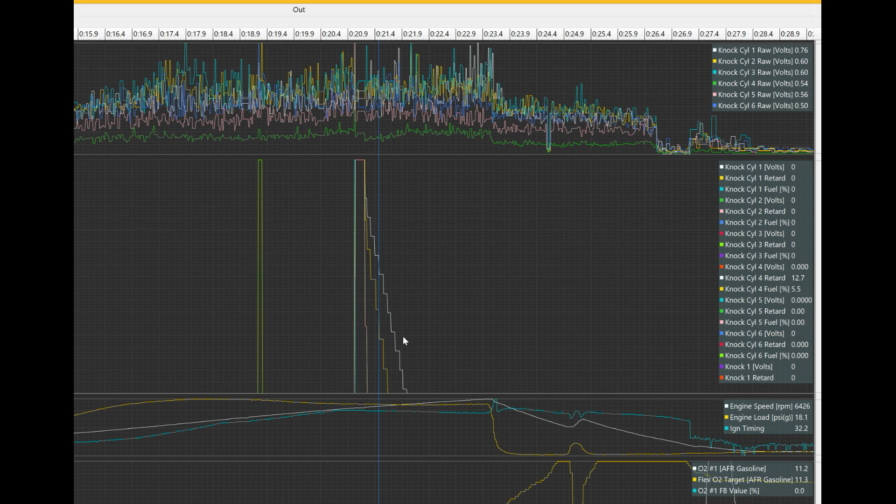And so in this case, this was the only knock that we found all day with Stickers. Through this point, we were able to continue to add timing, and we found out that we got to the point where we couldn't add any more timing because we weren't getting any more additional torque gains. In this one instance, it was the only time where we found that with this amount of timing, which was 32 degrees of timing, which is a lot of timing at that point in time, we actually ran into some knock, and so we needed to back that down a little bit to keep things safe.

Following this process, we're able to maximize the fuel, the turbos, and the timing advance to get the most power the car has to offer across the entire power band, while at the same time protecting the engine from detonation.